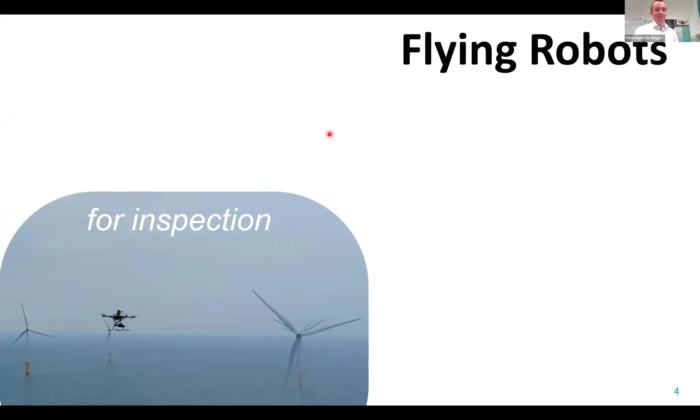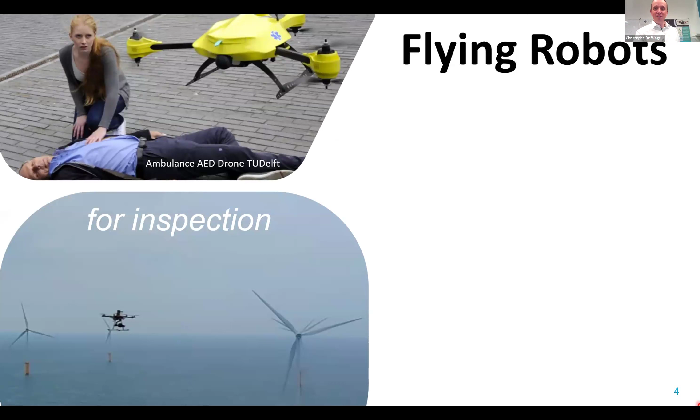So the topic is flying robots. I don't have to go into great detail of what they're used for, whether it's inspection of the vast amount of infrastructure all over the country, flying far out at sea and inspecting a windmill, or bringing a defibrillator while quickly navigating around obstacles in a city. We think it should be part of the achievements of the future. And of course, package delivery is highly discussed and already applied at many locations.

We think for many applications, flying robots will need to be able to hover, whether it's for inspection or delivery, for landing on a ship or in a small area within a forest. Hovering is paramount. But a lot of applications also require long distance or fast flight.

If you want to bring a defibrillator, you'd better be fast, for rapid aid. If you're flying too slowly, it's going to take longer, which also requires more energy. And we want to fly longer missions. Unfortunately, these two are pretty incompatible, conflicting.

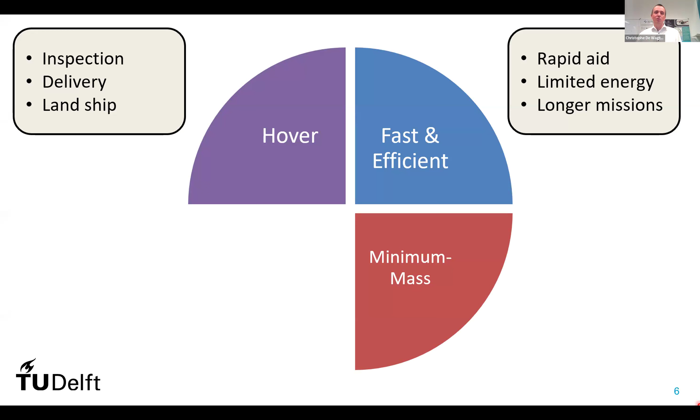At the MAVLab, we try to focus on also minimizing the mass. A lot of applications can be solved with a bigger device, which is great, but we think for some applications you have an advantage when you're smaller. For instance, if you're in the vicinity of people, safety can be an issue. Cost is typically less for a 1 kilogram than a 100 kilogram flying vehicle. The use of energy in aerospace is a very recurring important topic, which can also be addressed with minimum mass, which is why we put it in our requirement list and even in the title of our lab.

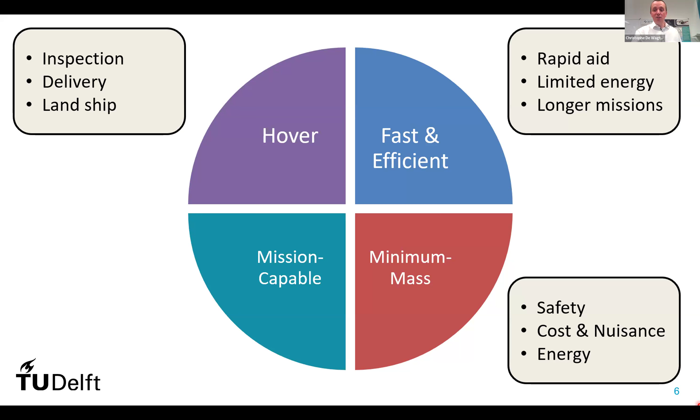And we want robots that can actually do something. So always a top-down approach to keep mission-capable autonomous platforms. I would like to look at this combination of hover and fast flight from several dimensions.

The first is efficiency. What would it look like if you want to achieve the ultimate combined hover efficiency and forward efficiency? What would it look like if you're trying to merge these requirements into a flying robot, but you're mainly focused on endurance? What would it look like if you try to make the smallest possible platform? And last but not least, if you need to navigate very quickly through very complex environments, what speed of flight can be achieved?

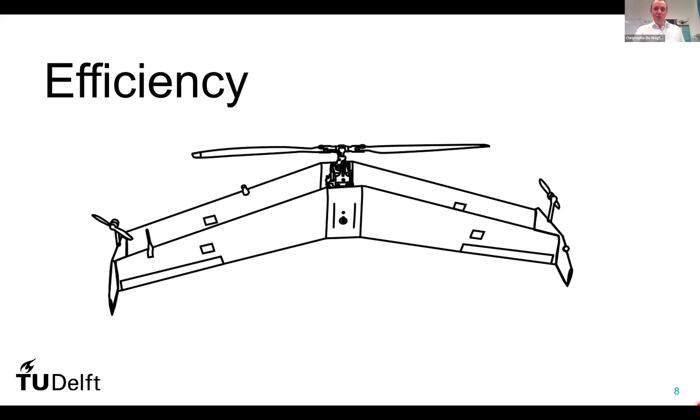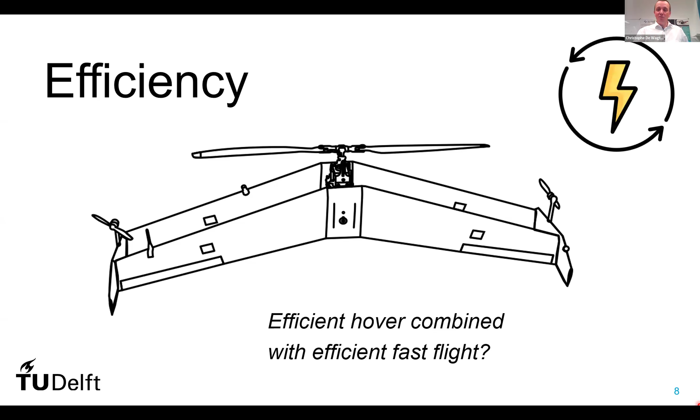But first, efficiency is not unimportant in aviation. How do you combine efficient hover with efficient flight? We tried a lot of things, but the most efficient way of flying forward, flying from A to B, is wings. The most efficient devices are probably gliders. They can have lift-to-drag ratios of easily over 50, which means they use very little energy to stay in the air. These wings are very efficient for going from A to B.

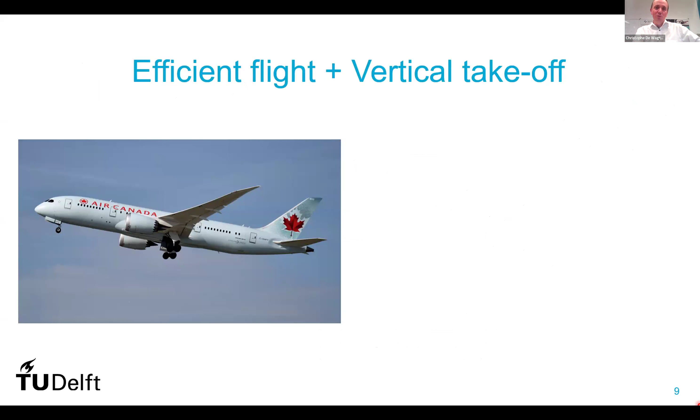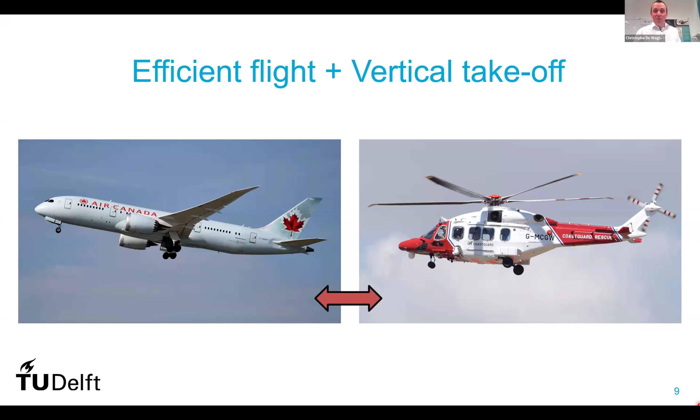But they cannot land vertically, so therefore a big, slow-turning rotor is the theoretically most efficient solution. Actually, theory says probably a single-blade rotor would be the optimum, but it comes with so many drawbacks that it's not often done. But these requirements are very conflicting. So let's have a look at a few possibilities to combine them.

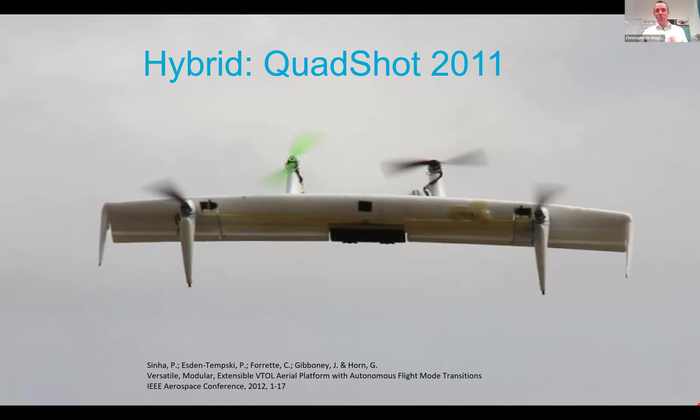But if you optimize more for cost, having 2 propellers is more efficient than 4. So leaving out the 2 tip motors, but adding big aerodynamic flaps behind it to do the pitch and yaw control also works. And you end up having a slightly lighter vehicle. But again, you're using the same propellers for forward flight and hover, which is not efficient.

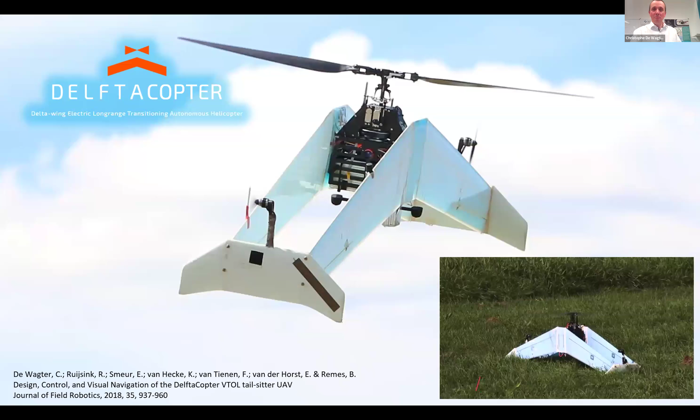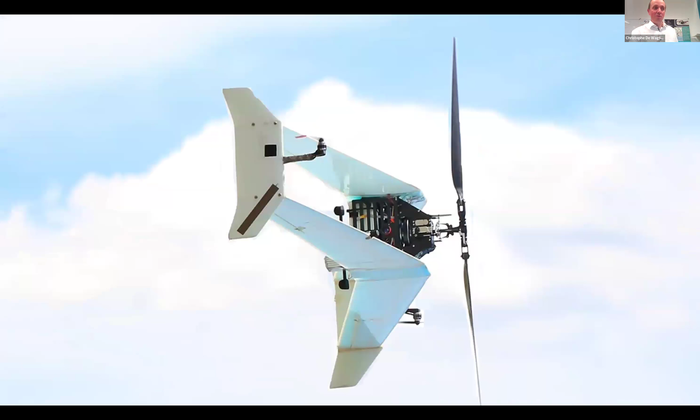So what is the ultimate solution? Well, a very big rotor, which can have a small pitch angle for hovering, and then for forward flight, transition the entire platform 90 degrees and use the same rotor, but at much lower RPM and much higher pitch to fly super efficiently forward, while the entire mass of the vehicle is lifted by the delta wing.

This is the so-called Delftacopter. It's fully electric, designed for a competition where it needed to fly 60 kilometers in normal outdoor conditions with 25 knots of wind. We were the lightest participant in this competition. Most participants had 20 kilogram vehicles, and we only had a 4.3 kilogram electric platform, thanks to the amazing efficiency.

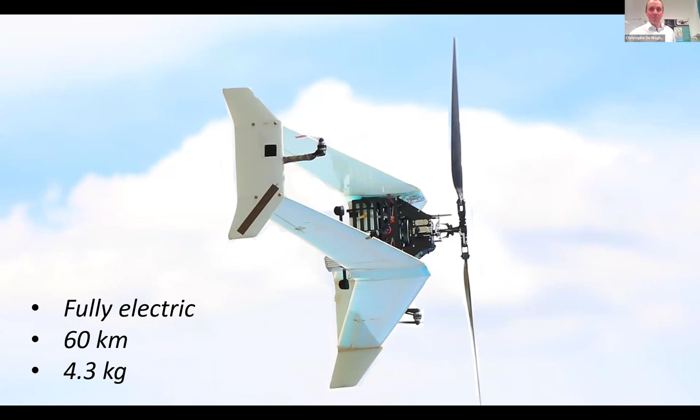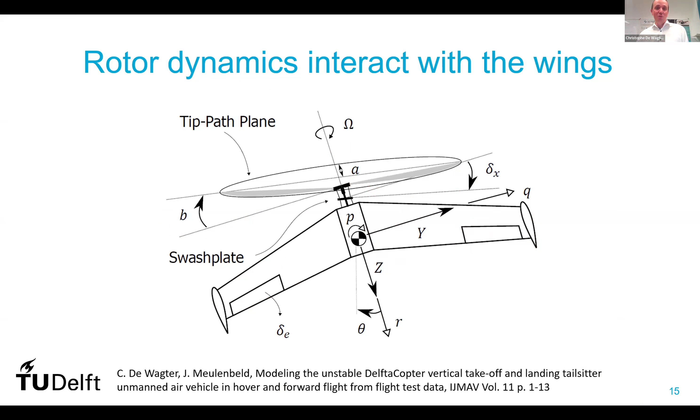It didn't go easily because this big rotor combined with a big wing interacts heavily with each other. So we are basically steering two vehicles at once, a collective and cyclic pitch controlled helicopter rotor with a fuselage behind it. Probably most of you know that the gyroscopic disc, if you apply a pitch moment, then it rolls. If the wing applies a pitch moment using the elevators, instead of pitching up like a normal fixed wing, it would yaw. So complex control and aerodynamic interactions.

To show it's a full robot, it has computer vision on board, can find the landing patterns and land on it, deliver the payload.

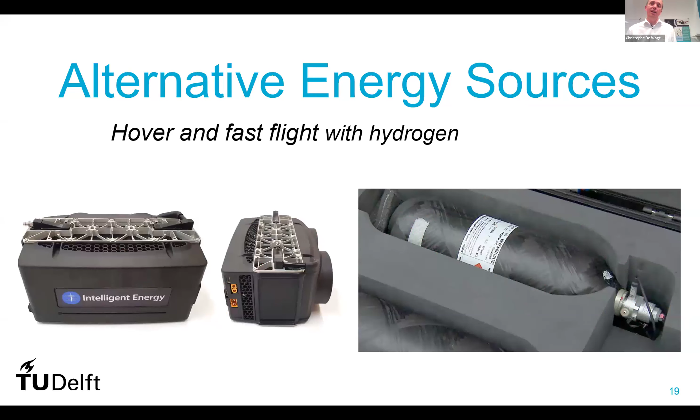If this isn't enough, we were flying with batteries here, so if we want more endurance, we have to do something more. We can, of course, wait until better battery technology comes around. But if we want it now, another solution is to replace the energy with alternative sources. We still wanted to do electric flight, so we designed a different type of optimized hover and fast flight capable platform around a fuel cell, an electric fuel cell that converts hydrogen to electricity. As a hydrogen source, we selected compressed hydrogen because that allows us to generate it on the spot and compress it into the bottle and store it for a long time.

Power here is really the problem. So we have a lot of energy, but very low power. We need to be still very efficient to fly. And for the non-efficient phases like hovering, you need something extra.

The other problem is safety. We had to go through rigorous testing, for instance, dropping these pressurized hydrogen cylinders to see what happens. It turns out from up to 50 meters on concrete, they bounce like a basketball, but the metal parts tear apart and then they leak and go inert after all the hydrogen's leaked out in a minute, and then they're safe to approach again.

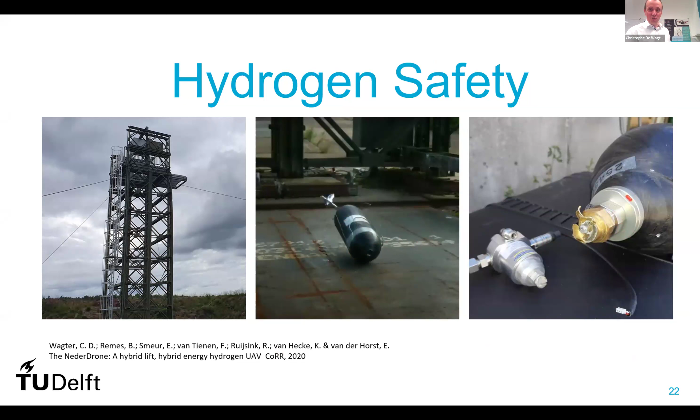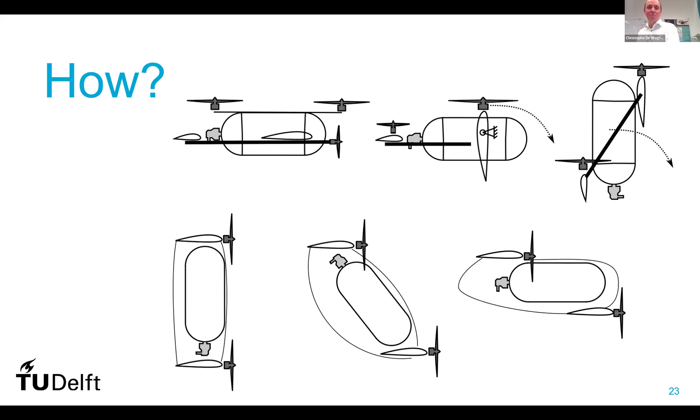Set up some procedures, and then we're ready to design a drone around it. But how? What's the optimal shape around a pressurized hydrogen cylinder? We tried a lot of things as illustrated here. You want a tilt wing or a tail sitter or an inline or something in between. And we ended up selecting this.

A tandem wing configuration with an efficient fuselage around the fuel tank with the fuel cell in the back, some extra air inlet, because fuel cells, as you might know, create more heat than they create power. So for every watt you use, it creates at least a watt of power of heat as well, which needs to be evacuated.

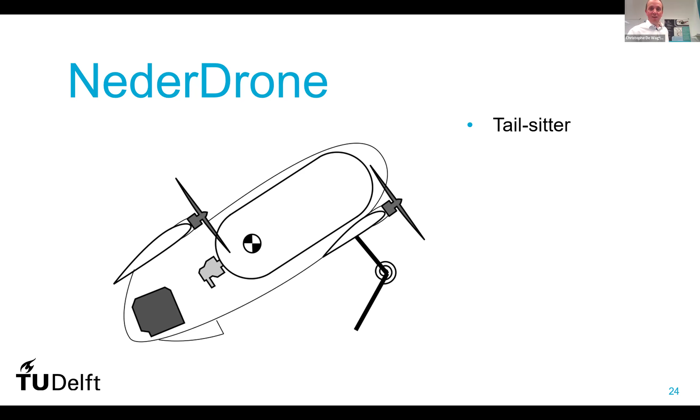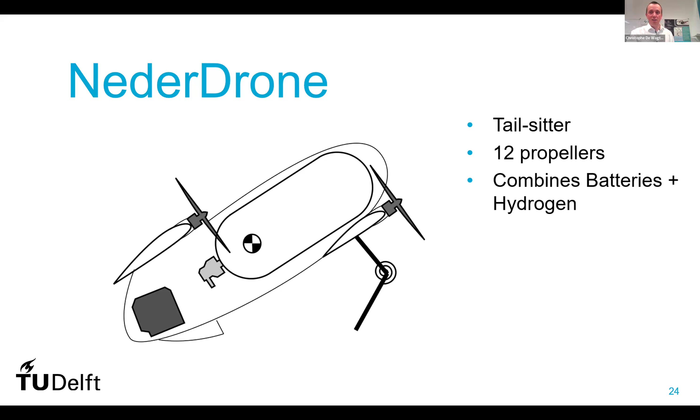It's a tail sitter with a lot of propellers for redundancy, which is needed in order to fly here in the Netherlands and get the required permits. And it combines the fuel cell with batteries, because the fuel cell alone is not able to deliver the power needed for hovering. So electrically, it's also challenged to recharge in flight, etc.

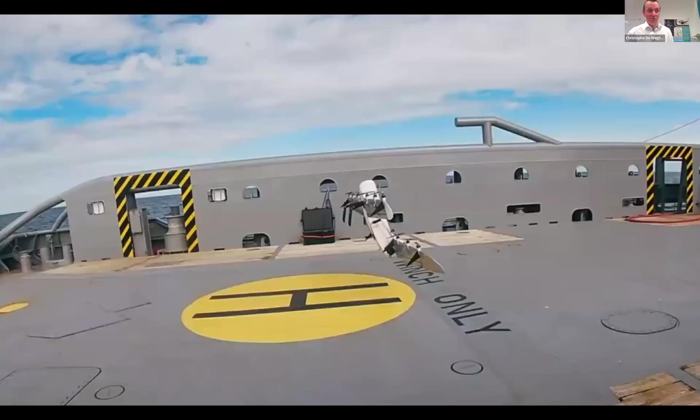There's a few images of what it looks like. Somebody putting the cylinder in. This is for cinematic purposes, but in practice, you would attach the cylinder, and then you can take off, for instance, from a ship and land and fall back on its nose.

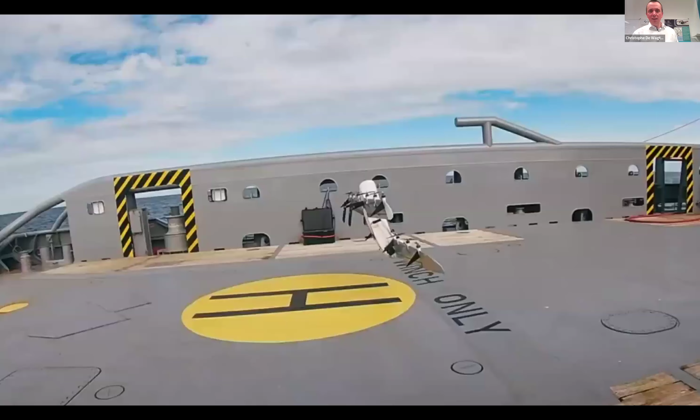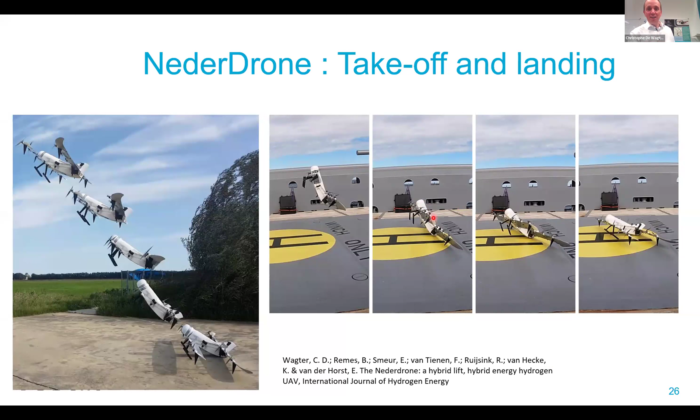The tandem configuration has to do with the fact that we want the smallest wing as possible. So having two wings gives them slightly less wingspan. And because we wanted a very low center of gravity, it ends up being a bit like a canard. The takeoff is the so-called angled takeoff. And after the vertical landing, it still needs to lower the nose onto the landing gear.

We've flown this hydrogen-powered, hovering-capable, fast-forward capable platform for up to 4 hours over the Dutch North Sea and over the ocean, with winds up to 25 knots, so 12 meters per second, sea states, and landing with waves of 3 meters. So we think it's already real-world conditions, not just lab conditions, with payloads and autonomous flight.

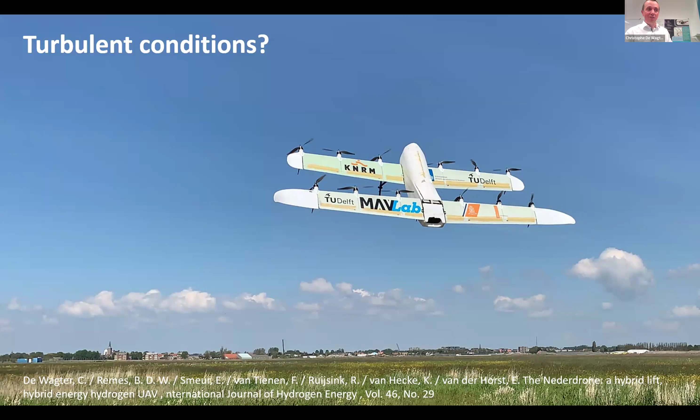But in very turbulent conditions, if you have a lot of gusts, these long wings are not ideal while hovering. The last phase, when you want to land on the ship, for instance, there's a lot of turbulence from the vessel. You would like to remove the wings, actually.

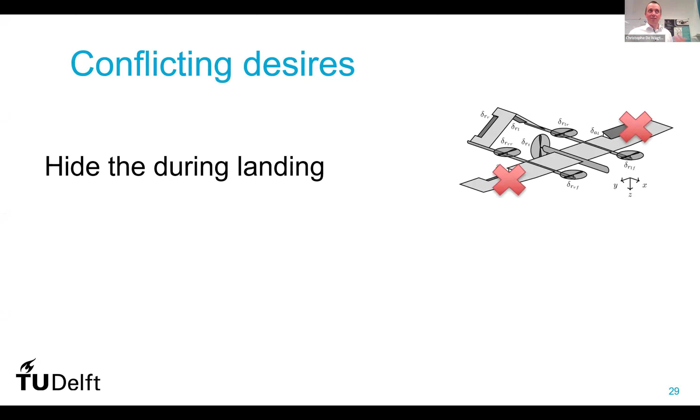If we look at our desires, this hovering and fast flight is pretty conflicting. During the landing, we ideally would like to get rid of the wing, because it's an aerodynamic surface that is picking up turbulence, which we'd rather not have. And while flying fast, we have all these motors that create extra drag, so that limits our maximum speed.

To address this, we have proposed a rotating wing solution. It's patented, and we have a spin-off that is taking it into production. The idea is that during fast flight, the wing rotates such that the motors are hidden in the fuselage to highly reduce drag coefficients at fast speeds. We also have stepper motors in to align them perfectly with the flow.

And during hover, the opposite happens. Then the wing rotates over the fuselage like this. And the fuselage is damping all the aerodynamic properties, which means that the biggest perturbation forces that are still acting on the system become much smaller. By having this time not a tail sitter, but an in-plane solution, and having the biggest gust being horizontal, this device can handle much bigger turbulence while landing, while still being very efficient in forward flight.

To show our prototype accelerating, rotating its wing, and then continuing as a fixed wing, we have this video here.

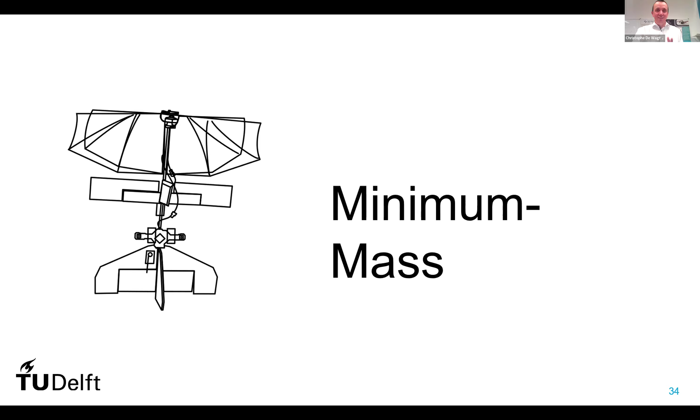So this is what we think it looks like if you want to put available solutions of alternative energy in our electric robots. What comes out when you try to optimize hovering and fast flight while trying to achieve minimum mass? To look at this direction, I want to first look at nature.

There's some beautiful examples of very small, lightweight creatures that can do very interesting jobs still. And that led to our design of the DelFly in 2005.

The initial design goal for DelFly was to enter a building flying outdoors pretty fast, and then hovering inside. But the technology to make small helicopters indoors in 2005 was not ready yet, while this flapping wing exhibits inherent slow hovering stable flight.

So it flies at 0.5 meters per second thanks to an aerodynamic tail. It is completely stable like a fixed wing, even when flying super slow indoors. So it had all the advantages of helicopters and fixed wings at the same time.

On top of that, the wings gently bounce off obstacles because at the end of their stroke, they reach 0 velocity. And unlike propellers that cut quite a lot, so if you want to fly close to people, that's quite a bonus. Slow hovering flight and fast flight combined in a new design with flapping wings inspired by nature.

The total mass is like the same as 4 sheets of paper, so 4 sheets of printer paper, about 16 grams. It also has a camera, a video transmitter, and the first versions were processing the images off board.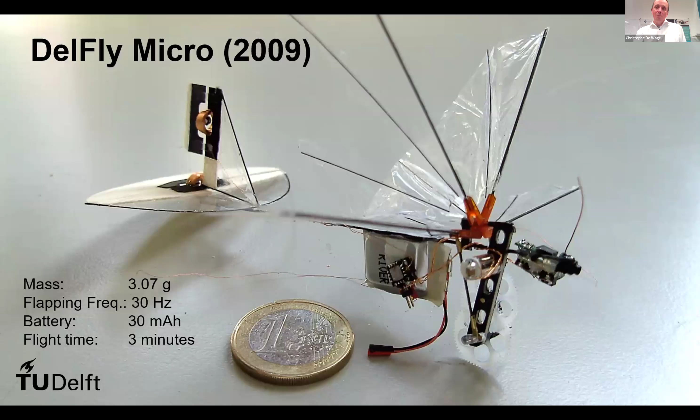We made an even smaller one, which is like 8 foot, 10 centimeters, 3 grams. 3 grams is less than a sheet of printer paper. And for that mass, you have a battery, a receiver, a controller, transmitter, motor controller, motor, gears, ball bearings, crank or rocker mechanism, double pair of wings, camera, transmitter, elevator with a coil actuator, everything.

And to show that it actually flies, with a small video. The images are not HD yet, but it's from a few years ago. But it actually flies. It's a flying robot, very small.

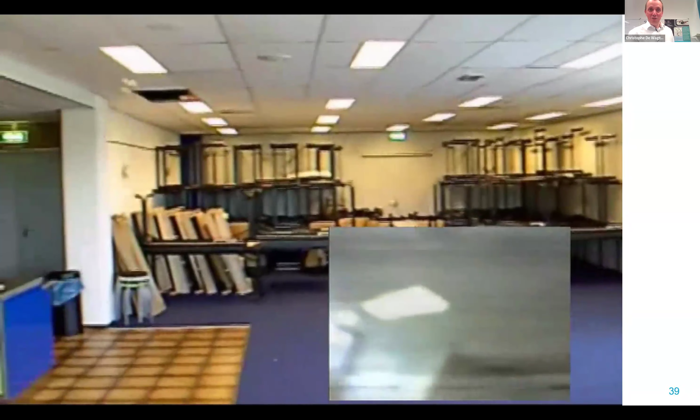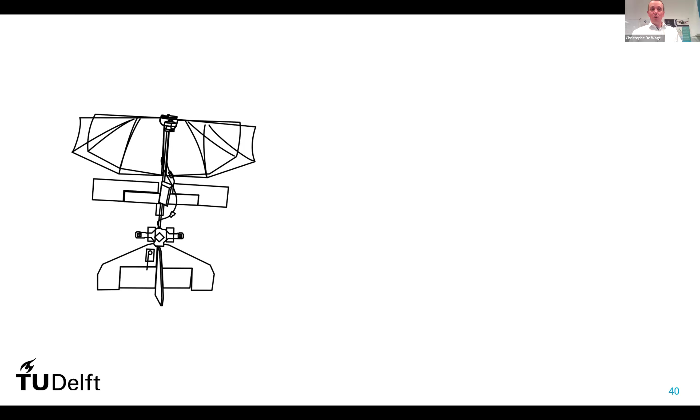I already said that it's stably hovering thanks to this aerodynamic surface, but that's also a pitfall. If you're flying indoors and you're very light and there's air conditioning ducts and airflow, this aerodynamic stabilization is actually a perturbation. It would work much better if you remove the tail and have software or electronics stabilize the platform. So that was the obvious next step.

Here we had 4 pairs of wings to allow real hover, this time standing still indoors and reacting to gusts while flying relatively fast. It is a small drone, only 30 grams, but it can reach speeds of up to almost 10 meters per second, hovering and fast flying.

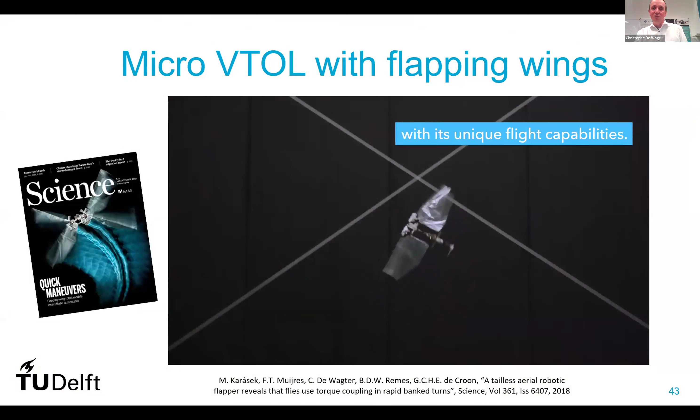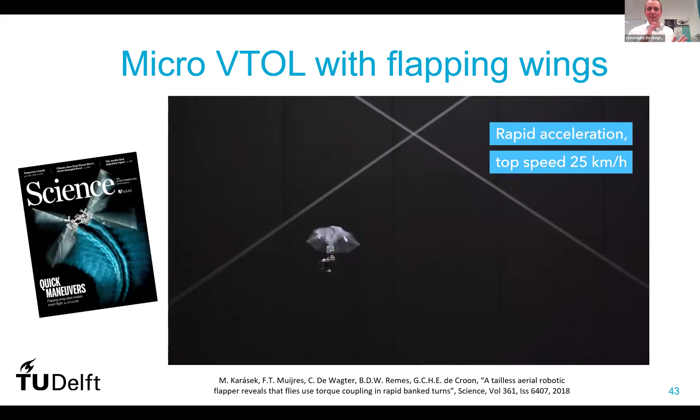The next iteration had only a double pair of wings and featured in science because it was so agile that it could mimic some of the behavior that fruit flies do. By systematically checking a wide range of flight conditions, we discovered a new aerodynamic effect that biologists had seen flies do that they could not explain.

But it's not a robot yet, so we have an agile platform that can hover and fly fast indoors and outdoors. But how do you make it into a robot? At that scale, we run into a problem.

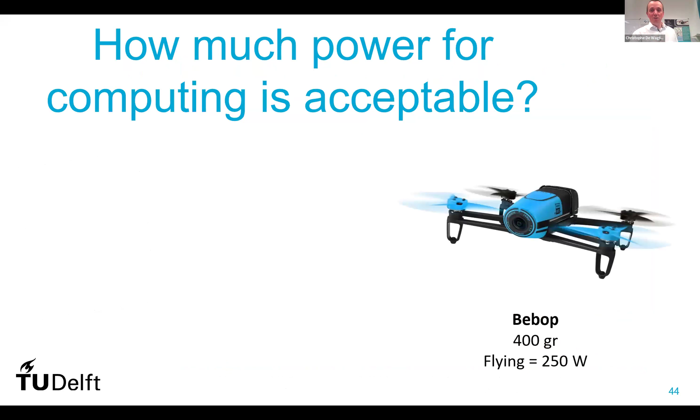If you have a 400-gram drone, flying takes about 250 watts, so 10 watts of compute is probably acceptable. But what about if you're much smaller and your flying is only 30 watts? Or even worse, if you're flying for 2 watts, you can never afford to carry so much CPU power. Aviation is still something where any power, any mass must be optimized to the fullest.

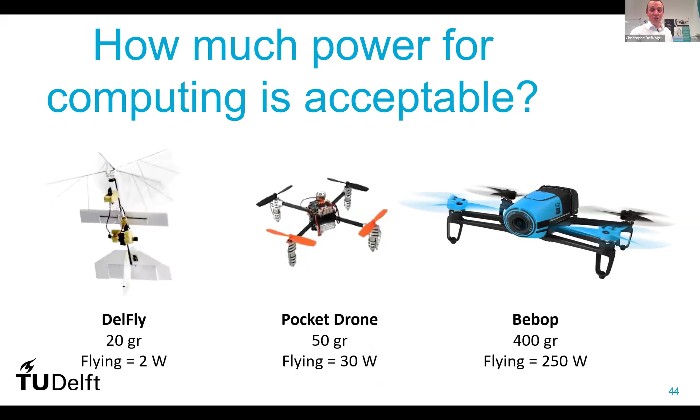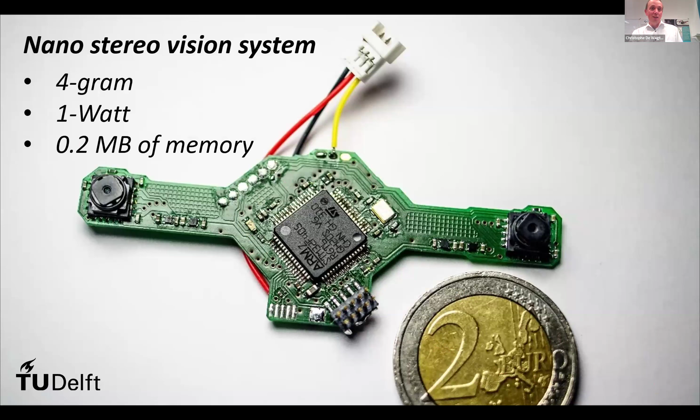Which is what we tried with our DelFly series, by giving it a set of nano eyes - I have some right here - the own designed PCB system, which merges a CPU with an FPGA, the camera streams on the back and then processor on the front. We managed to make a 1 watt intelligence system that allowed the DelFly to navigate indoors and then even detect doors, open doors, and fly from one room to the next automatically.

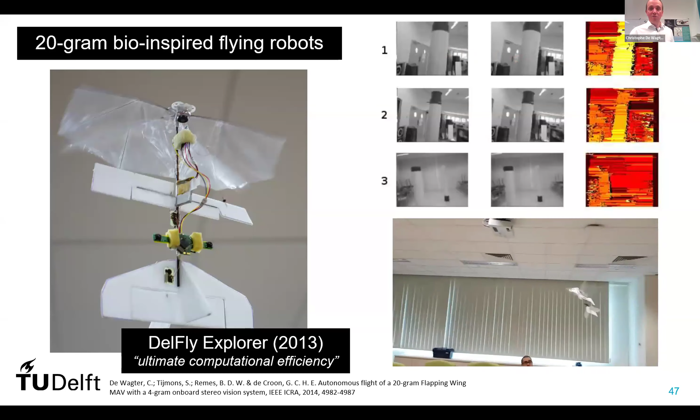As you can see, the images are not looking super beautiful, but for robots, the goal is not to make beautiful images, it's to react properly to the environment. We've shown that this can be done perfectly well like this. So we used nature as inspiration for our robots, and then in turn provided new insights on how flies actually make such aggressive escape maneuvers and fly so efficiently.

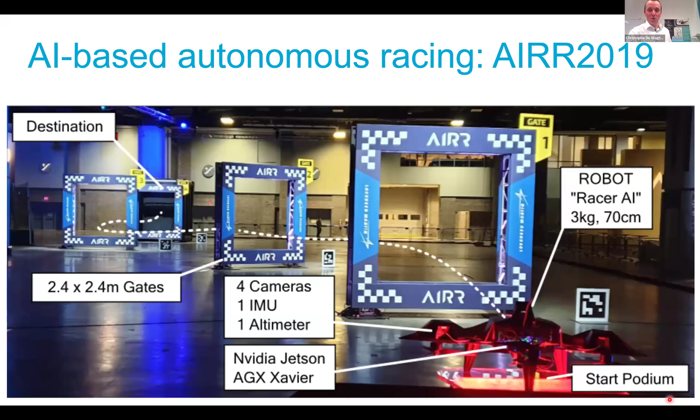Last bit is, what about if we are interested in hovering, but also flying as fast as possible, but there are obstacles in the way? There, efficient AI is a very hot topic of research. One of the tasks we're looking at is, for instance, this AI-based autonomous drone racing, where a robot needs to take off from a start podium, fly through a set of gates, and perform a mission completely automatically, based on camera images and some onboard sensors. And of course, all the processing has to be on board, a real robot.

Then suddenly the wings don't matter, the agility, the aerodynamics are not the bottleneck. No, the bottleneck is that you get images like this. You need to understand what it means, where to go, where to move around. And the obvious solution to that is AI.

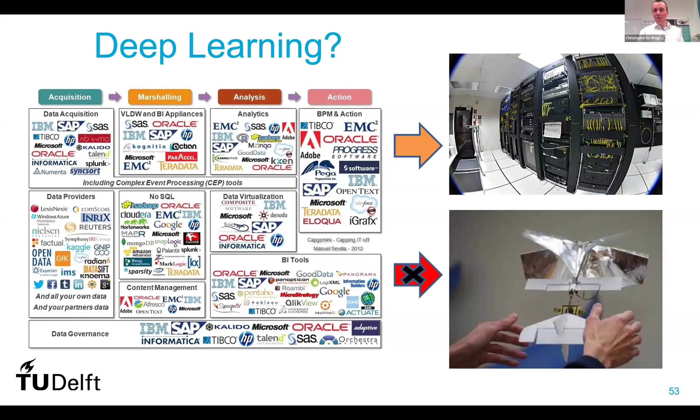Deep learning, to be more precise, has shown to be very good at solving this problem. But although there are a lot of companies working on it and the results are amazing, these are all technologies that are designed to run on data centers. And if we want to make robots, we still have a problem because the good algorithms are too heavy to put in our flying machines, especially our fast, smaller drones. And if you're running a race and everybody has the same hardware, if you have a more efficient algorithm, you can run it faster, you can react faster, and then you can, in the end, win the race.

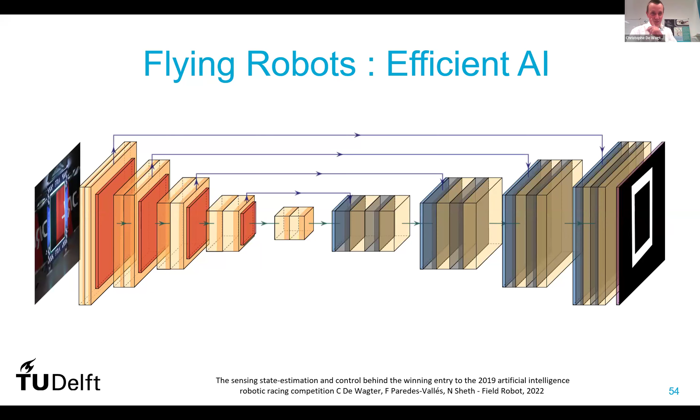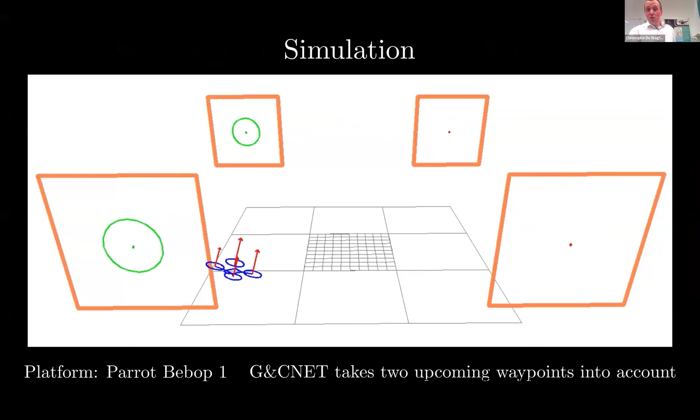So this has been our focus at the Micro Air Vehicle Lab from the start. Making these small robots is also a way to force ourselves to make things more efficient. For the race I just mentioned, we proposed a solution that was super efficient but would capture the entire problem correctly. We also made a very light neural-based controller to convert the best performing optimal control algorithms on board.

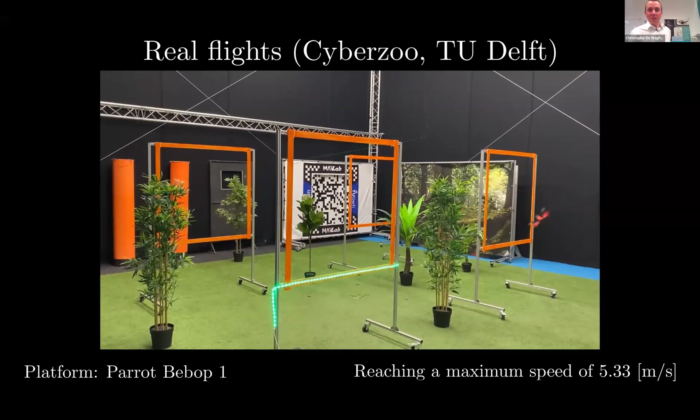Optimal control is amazing, but it's also very expensive. So in these flights here, we are mimicking the behavior of a very complex optimal solver using very light AI techniques and flying this particular drone. It doesn't look super fast because it's a slow drone, but it's really flying at the limit because there's always a few rotors saturating. So in terms of control theory, pretty complex.

And that allowed us to become a world champion in AI-based drone racing with the DRL and AIRR competition in 2019.

In reality, this network is multiplying zeros most of the time. According to our tests, more than 80% is multiplying zeros, but you can't leave them out, otherwise some situations don't work. It's not efficient though. If a robot needs to perch and observe for a long time and the image doesn't change, it's completely inefficient because nothing's changing, yet you're processing all these connections all the time.

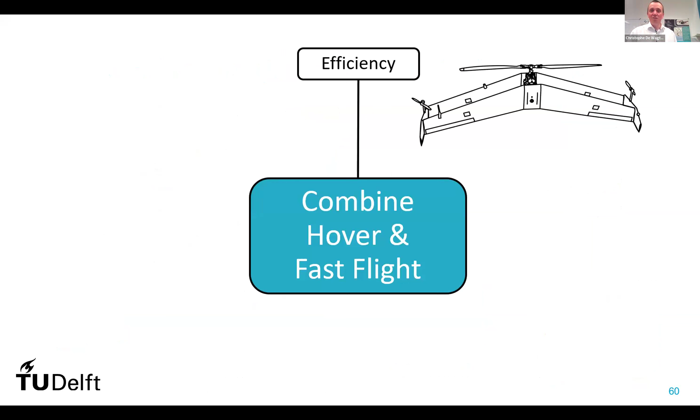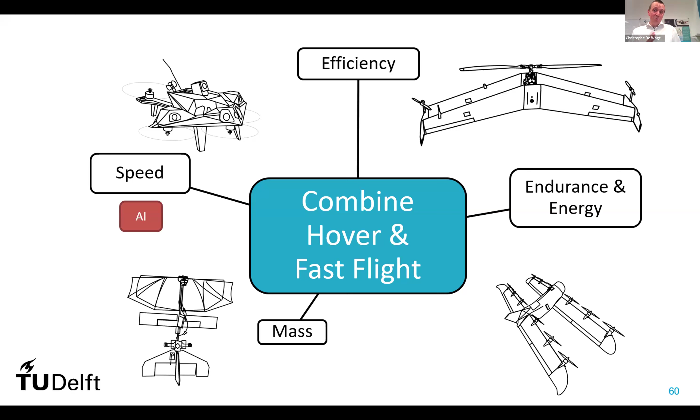So we've seen a few directions for combining hover and fast flight: one for efficiency with many concepts, one for endurance with novel types of energy in drones. What happens if you optimize for smallest possible mass while still having a robot, versus optimizing for speed? Optimizing for speed turned out to be, at this point, mainly an AI challenge—that might change, but with more efficient, lighter AI you can run it faster and do more. Efficiency is a control, propulsion, and aerodynamics problem combined, but that one has more technological readiness.

Endurance looks simple—just put hydrogen in a platform—but it's quite a safety challenge. Power is also not obvious, and the design changes dramatically for any different fuel type. In the future we'll still be looking at alternatives. Once you minimize mass, you get a very high benefit in terms of safety, but it comes with actuation problems, which we overcome by adding degrees of freedom in our flapping wings, and severe computation limitation problems, which prompted us to solve the AI issues too.

Together these address a lot of technologies that are also very important for manned flight, which, as you might have heard, is also part of my interest.

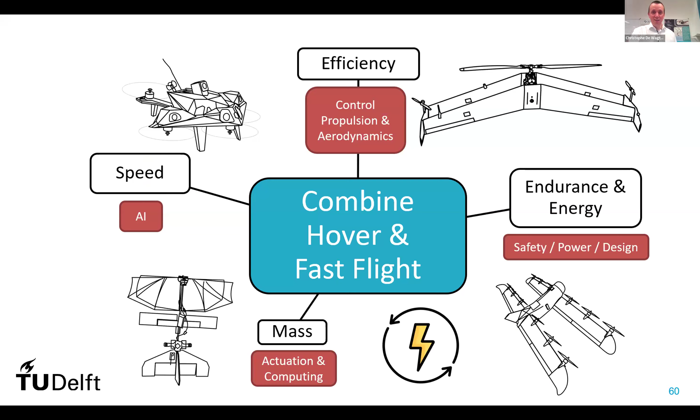I can't show this without thanking all my colleagues. Professor De Croon is leading the MAVLab at this time, and project manager Bart Remes is doing a lot of work to bring these technologies to real life, to startups and spin-offs, and to hopefully inspire industry with some of our solutions to come up with better platforms. I hope this is more or less the time you anticipated, and if there are any questions, I'd be glad to address them. Thank you in advance.

That's a pretty impressive presentation and content—a lot of progress packed into a 35-40 minute presentation. That's amazing. Many of us have looked at or dealt with one or two of the challenges you talked about, but working on so many different aspects and the full spectrum of challenges in this space is amazing, really impressive. No wonder I always heard Delft is a pretty amazing university—now I know why.

Thank you so much. Well, of course, a lot of credit goes to my team—a lot of people worked on this for a few years, as you mentioned. But we hope at least some of the solutions can inspire other projects to make important steps.

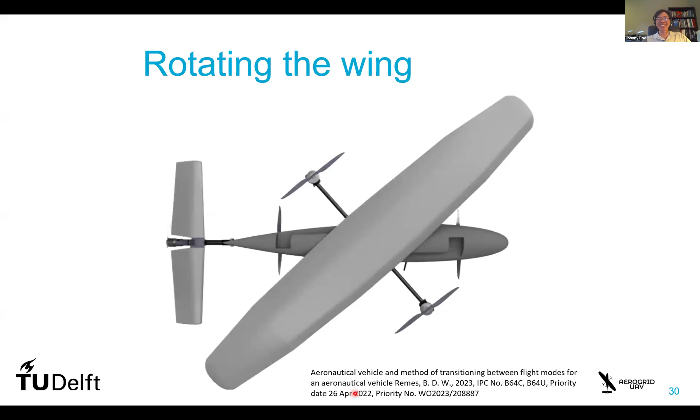The added mass doesn't weigh against the aerodynamic benefits, because you're in the boundary layer anyway. Interesting, yeah, I always thought about the scissor wing could in some way apply in the VTOL world, but I guess you already done it. So it's pretty neat. That is neat.

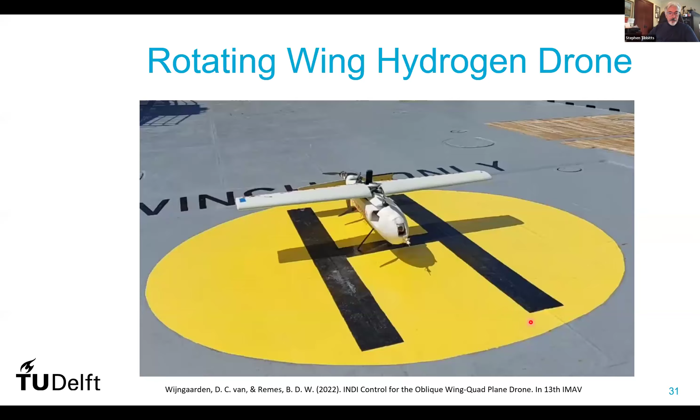Stephen, do you have questions? I do, can you guys hear me? Yes. Thank you, Christophe, it's a great presentation. I was curious, I'm interested in your spike processor. Did your team develop that silicon? And the question is really, is it scalable to real world applications and not a laboratory setup?

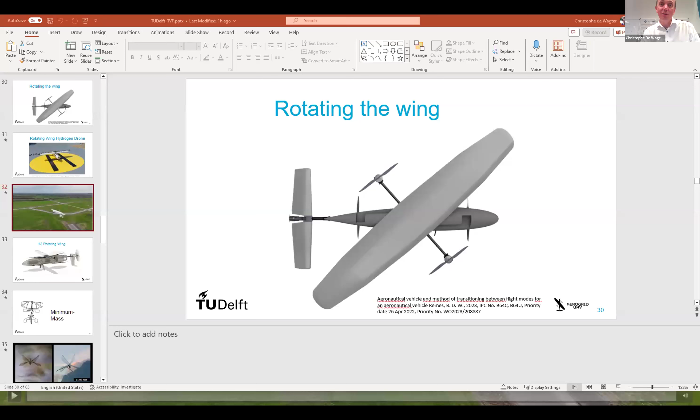Very interesting question. So the project I described here is with a product that we did not make. It was made by Intel, and it's called the Loihi, the Intel Loihi chip. Intel is creating the silicon. We have made some FPGA boards ourselves that do the same a few years ago, but now we're translating to real silicon, to make this into mass production. It's not something a university can easily do, so we partnered up with a producer like Intel, but there's more and more that do this now, so there's not a monopoly.

We think it's still early. We don't get the same quality of results in spiking nets than in traditional neural nets. However, because they're so much faster and orders of magnitude more efficient in terms of energy, it's still on a par, because the neural net technology works a bit less well in spikes, but you have way more speed, so they're on a par at system performance. But there's still a lot of research to be done. I would think it's still a few years before you can put this into bigger, commercial applications.

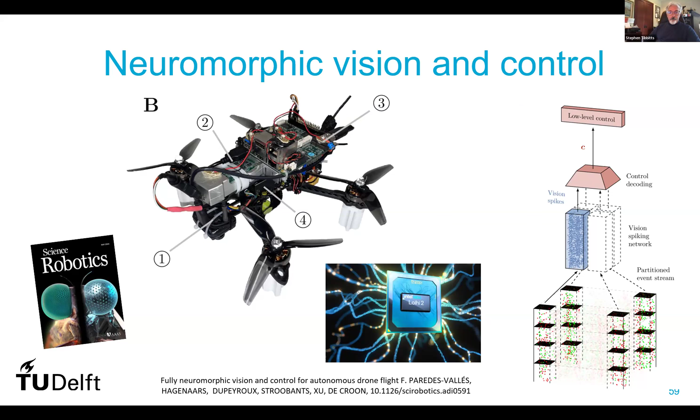Hey Bruce? Yeah, so I'll just love the oblique flying wing work. It's so different from the previous when we're looking at supersonic aircraft and high performance gliding. So I really like the use of that. Question: where do I find out more about this? Find some of your papers and such, definitely a lot of interesting stuff. And yeah, I agree, as Johnny said, it's a lot of work in a lot of areas. So totally fascinated by what you guys are doing at UAVs there.

Yeah, thank you a lot. I've tried to put the links to the papers under nearly every slide. We publish everything, the goal is to advance for everyone and not to keep it. But if you need some specific references, I'm sure you can forward the email to the organizers, and I'll be happy to send you whichever paper is of your interest.